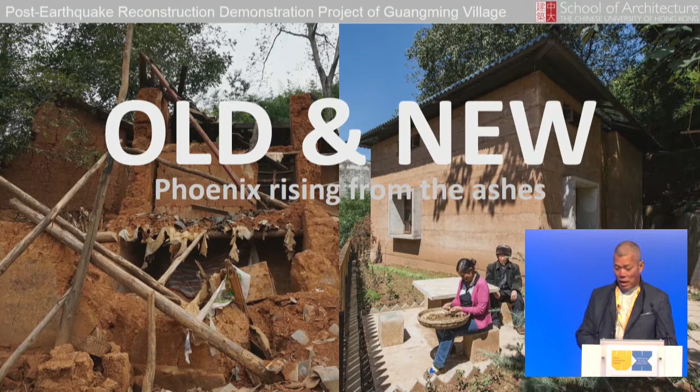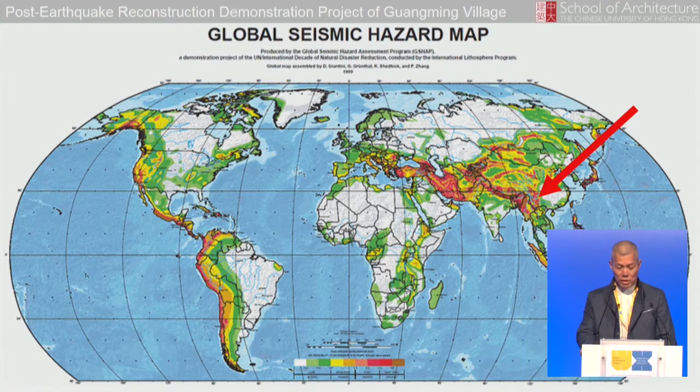I would like to tell a story of how old, as you can see on the left, becomes new, as is on the right. Around the world, millions of people live in seismic hazardous areas, and many lives have been lost, especially in developing countries of low living standard. So our story is not a one-off story. It is happening around the world.

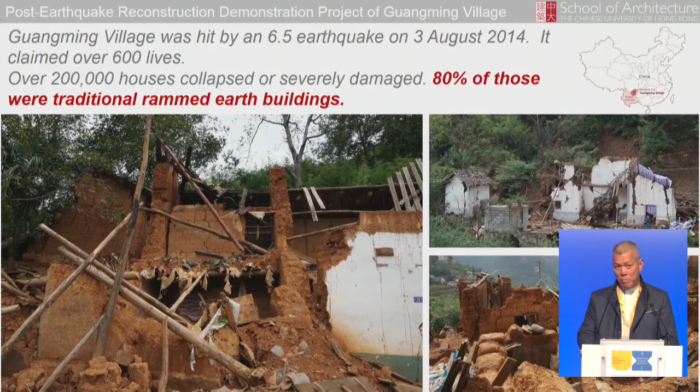The old lady told me, "We are old now and we can die in our tent." The earthquake destroyed houses. It also destroyed hopes and lives. Is that what life is worth? I don't think so, and we set to work. Our motto has always been high science and low technology. We have a number of visions apart from making the house safe. The most important of all is to add to life. We must rebuild hope, and life must continue.

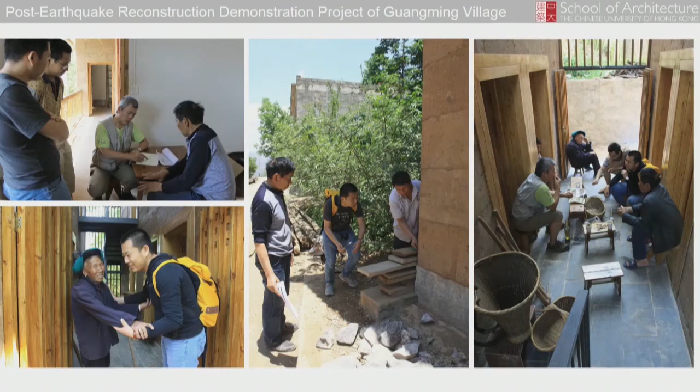Villagers have been living in their traditionally built earth houses for hundreds of years. This is their tradition and their heritage, and we wish not to neglect or deviate from this fundamental. And this provides a start of our journey. We talk to the locals to understand their needs and wishes. To rebuild life, you must work with people. And based on our understanding of the scientific principles of anti-seismic design, we dissect their traditional houses to identify problems and weaknesses.

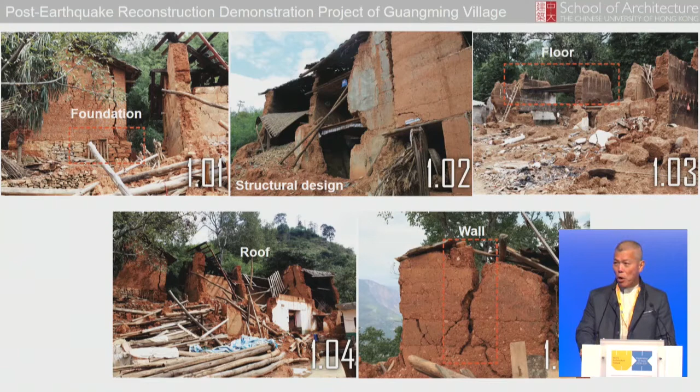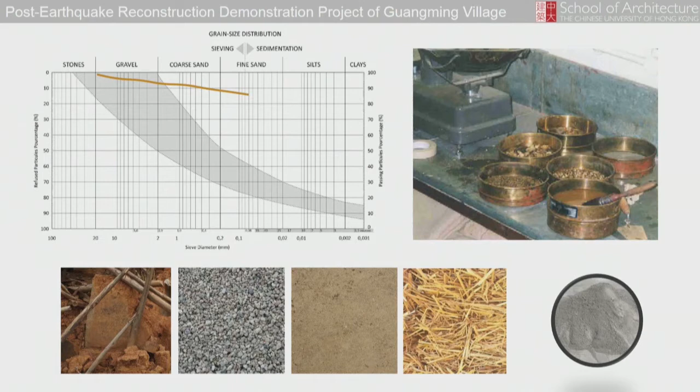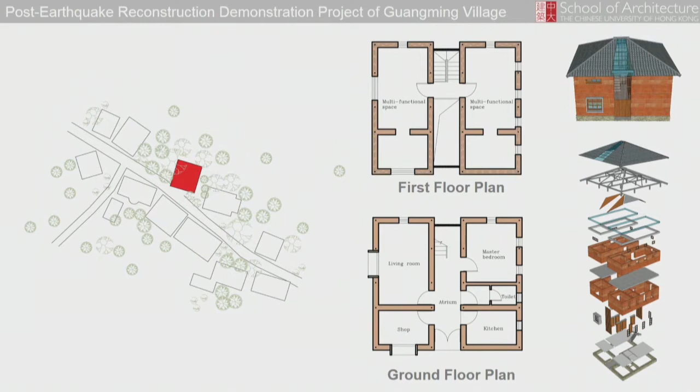We examine the composition of the earth they have. We try to optimize the mix so that it can be stronger and more workable based on our material science understanding. We designed with a simple form, modular layout, and system to improve the building's structural integrity, buildability, and also, more importantly, the spatial usefulness. And watch out for that little gap between the two blocks.

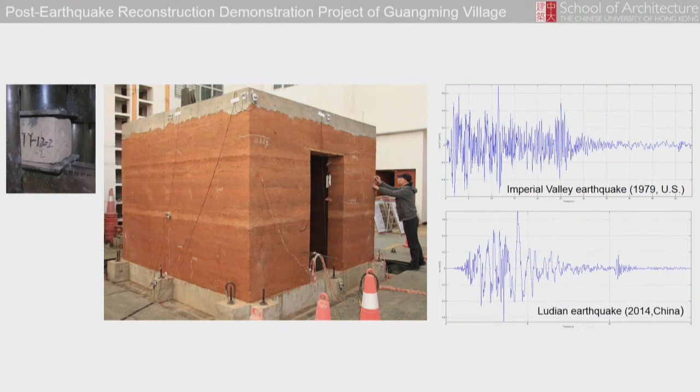We conduct tests to make sure that what we design is strong enough. The mud wall of our latest prototype can withstand scale 7 earthquake, and this meets with the national standard. The house needs to be environmentally sustainable and use very little energy. After all, the lady cannot afford energy.

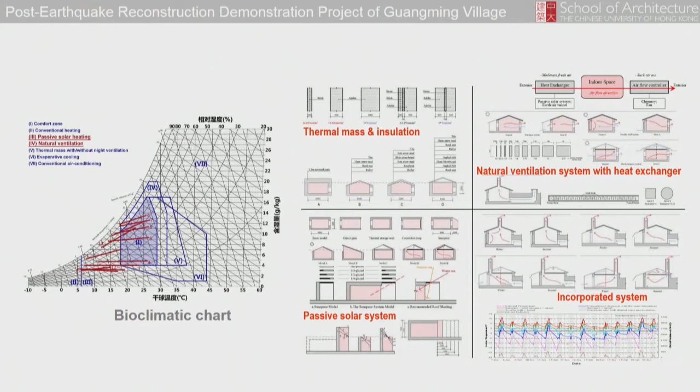We evaluate the environmental design of the earth house based on the local weather and comfort ranges. And we did a lot of parametric studies to examine the effectiveness of various options and designed systems. We also did cost-performance analysis to determine the right kind of approach and option. After all, we don't have too much money.

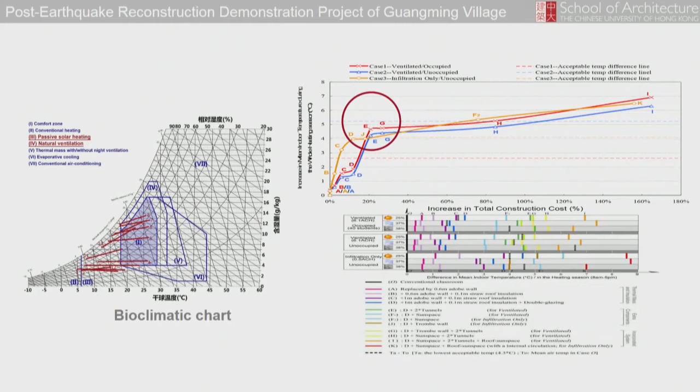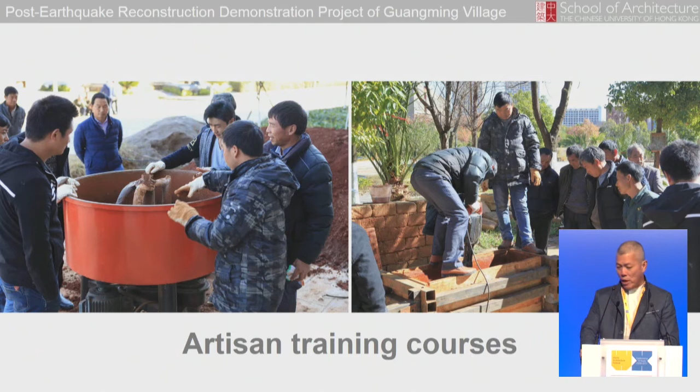Apart from the high science that I told you just now, we need low technology, both in terms of construction and social technology. We developed a construction method so that the local villagers can learn the techniques very quickly so that they can build their own houses. They are, after all, only farmers. We organized a workshop for them. For example, we taught them how to prepare the raw material on site using very simple tools and how to make walls with their hands that can stand up.

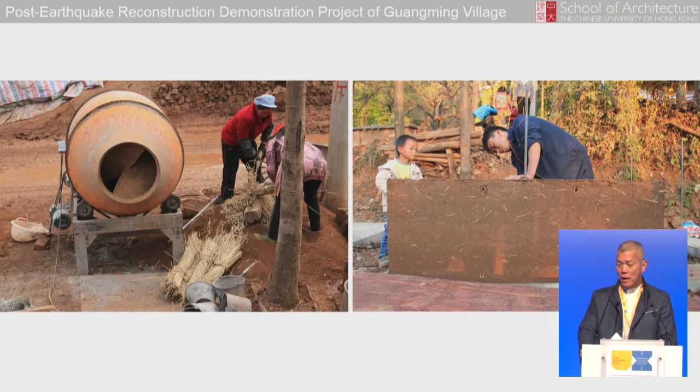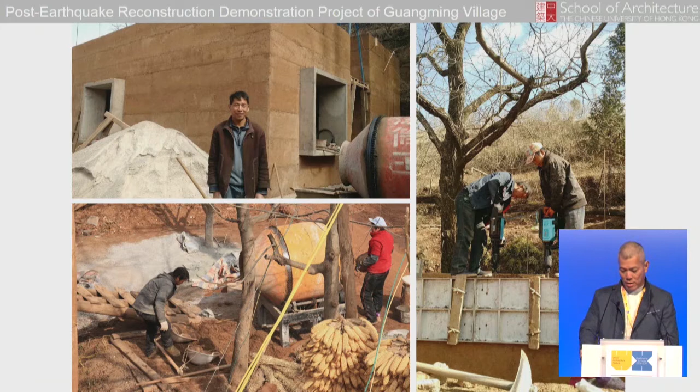We improved the tools and introduced a modular formwork to ensure high quality and consistent workmanship. We provide on-site technical supervision to make sure that they do what we think is correct. This is Master Yang, and he's our best supervisor at the moment on site. 3 years ago, he was a farmer. We do knowledge transfer, and it is very important for our project. The villagers need to know how to cope with life next time when the earthquake comes.

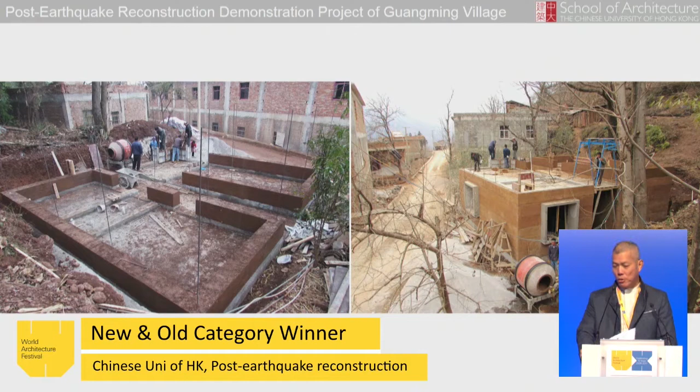These are some pictures of the building on site. The building took 3 months to build by the villagers. As the work progresses, we learned a lot from the villagers. And they know a lot about earth buildings, and they taught us a lot about how the details should work. So the learning is mutual. All in terms of material, technology, and life are now regenerated into new.

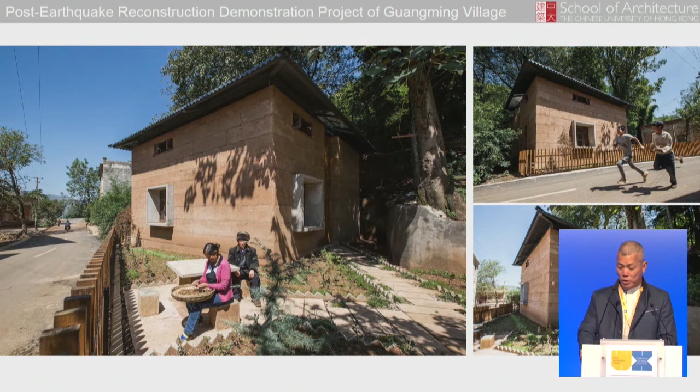This is our 36th prototype, and I use the word prototype to signify the fact that our effort is ongoing since 2005. The old lady now enjoys the semi-outdoor atrium spaces for her handicraft. It is brightly lit, thermally comfortable, structurally safe, and protected from the weather. The old man uses the second floor as his workshop for woven goods.

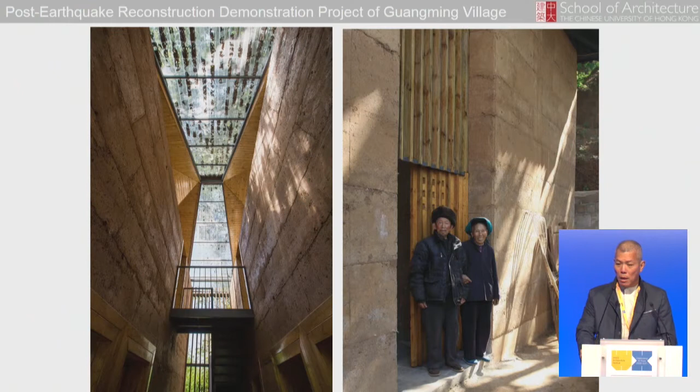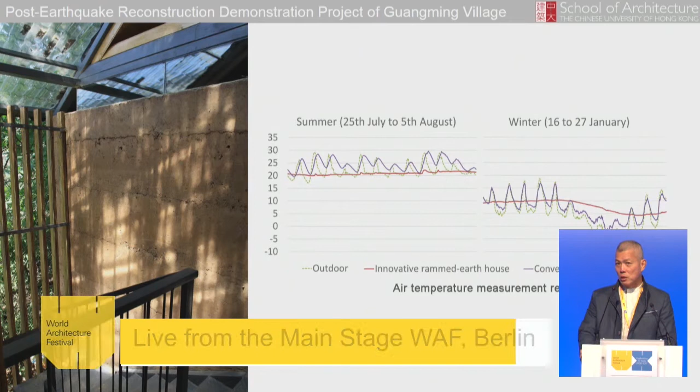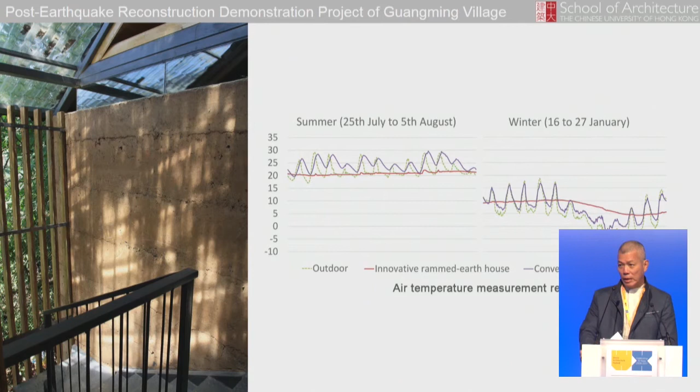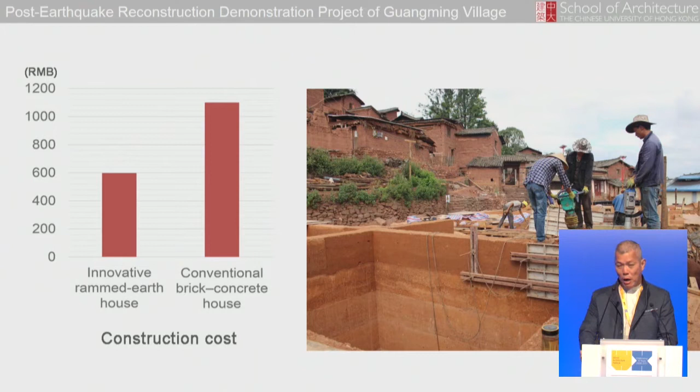The cost of the earth house is around half of a similar house made with concrete and brick infill. So the house is affordable. New life started without the banker behind you. And more importantly, our locally driven technique means that the dollar and the skills now remain in the village. A few of the villagers are now making a living by building earth houses for others.

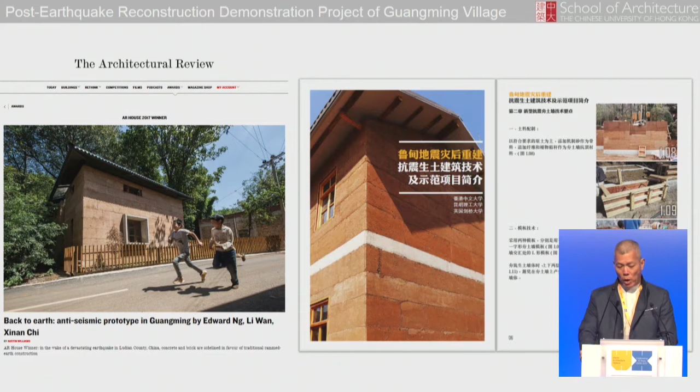As I have mentioned, the house is a prototype. This is our 36th prototype. And we're now summarizing our learning and drafting a technical code for the local government so that they can regulate it. Once that is done, the dissemination process can go easily. And as I speak, a lot more prototypes are now on site.

And since the July issue of the AR, thank you for promoting us, we have inquiries from around the world, from Nepal, Cambodia, Bangladesh, and also as far away as Colombia. We will transfer what we know. Prototype 36 is ready. One done, 20 are now on site, 100 million to go.

Disaster happens, we all work to save life. But more important to me, it is not just a house. We must work our architecture to give life back its dignity. Thank you. Thank you very much.

Ian? Thank you very much. Very enthralling story. Can you just mention the last bit of the building, which is the roof, and what that is made of and how that is assembled? Okay. The roof is actually a pyramid-shaped roof. A pyramid is itself a very strong form to start with. It is at the moment made with steel, but we design it in such a way that even if one or two of the walls collapse, the roof will stay on, because it is self-supported as a pyramid. So we designed the roof to cap the whole building.